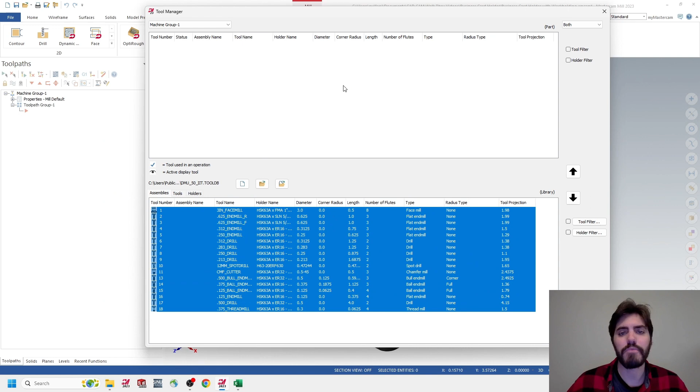Okay, so first and foremost, let's go ahead and get our machine set up as well as our tool library imported. So I'm going to go over here to machine, and then my mill, I'm going to just choose the default machine. And then likewise, again, good practice, come into the tool manager. Inside tool manager, we don't have anything in our library or our magazine. So I'm going to search for my DMU50 library here, and then I'm going to highlight all of these and copy it up here into my magazine using the arrow, so I can pull from it when I'm making toolpath.

All right, so next thing I want to talk about are the planes of this assembly. So if you right click in the free space here and I go to top, this of course is coming from SolidWorks, so the orientation of the planes are going to be a little bit screwed up. However, I think that works to our advantage because it's putting us in a good habit of setting up our planes, which are absolutely needed when we're indexing and rotating the tables for 5-axis. So let's go to planes down in the bottom tab on the left hand side, and we're going to have to reorientate this so we're looking down onto second operation.

So like we've done before, go ahead and click on the plus button in planes, and then click on dynamic. Once we click on dynamic, we should get our gnomon here, and we're probably going to have to fish for it a little bit, but there should be an origin that is coming from SolidWorks somewhere in the middle of our part here. You can see how mine is locking here, and I'm just going to go ahead and click. And we have to rotate around X, or in this instance the A axis, so that Z is pointing up. So I'm going to click on one of these red segments, and I'm going to lock my Z at -90.

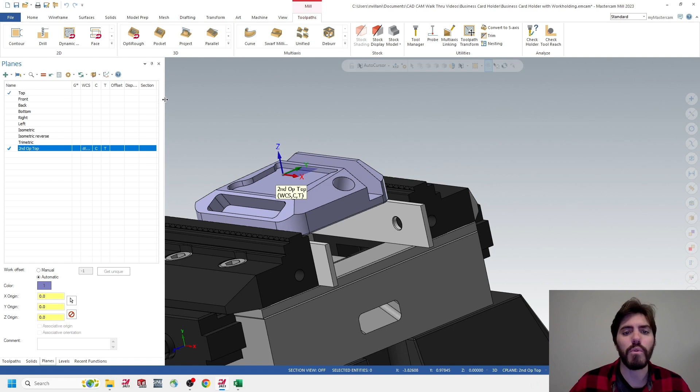I'm pretty happy where that is because that's going to be at my top face for my origin of the part. And I'm going to name this second op top, and then hit the green check mark. Okay, so now that I've set up this plane for this orientation, I want us to keep in mind some of the things we've talked about in previous videos, so that we have to set up our WCS, our C, and our T. When we set up our WCS, our C, and our T, that's just realigning our origin so that when I right click on top, I'm always looking down on the part, as well as my toolpath and my geometry are going to be created from this angle.

However, when we create additional planes for each one of these swivel rotations, you must always double check that your WCS is from the second op top. The WCS in the second op top is almost working like a G54 offset, or whatever offset command that you have. So you don't want to be calling up multiple offsets inside the same program because the machine is going to start to lose track of where it's at. So even though we're going to create multiple planes here for each one of these swivels, just make sure that we have a WCS set here.

Okay, so now that we got the first plane set up, I'm going to start bringing in some additional configurations and setting up planes accordingly to those as well. So let's hop over here to the levels tab, and you'll notice that we have our business card holder as well as all these different components that came in with the assembly vise and the parallels and things like that.

So I can easily toggle them on or off. That's fine. I'm going to keep them on here, but I just want to show you if you're having trouble kind of zooming around, you have total flexibility in turning these pieces off. So what we're going to do is we're going to try to match up some of the configurations that we made to the levels that we're making.

So if you remember, we made a first cycle 800, which is our first swivel rotation, and so on and so forth, all the way up to 5. So I'm going to make 5 different levels here that I'm going to paste or merge those different configurations onto. So go ahead and add a layer here. You might want to add a couple, so we can go 5 here. And I'm just going to name these accordingly.

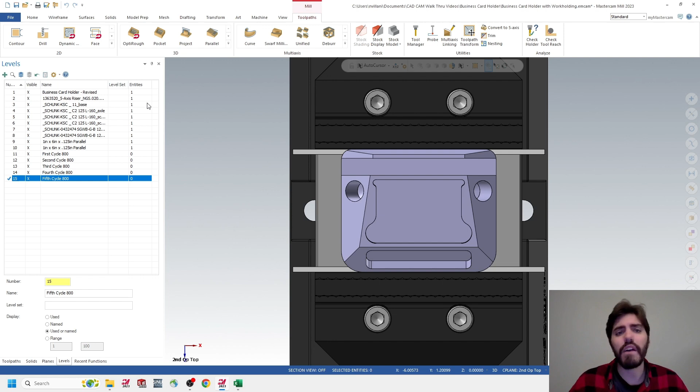Now this is important because whenever we're pulling in a new part or we're merging something into MasterCam, it's going to try to drop that part onto a level. And we don't want these levels to have multiple entities, especially if we want to be able to turn things off quickly, because you're going to be locking everything into one level. Obviously, you can kind of move them around if you right click on it, and then you can change the level here. However, I don't want to have to do that for every single part.

So I'm going to go ahead and click on the first cycle 800 and make sure that my check mark is next to that first cycle 800. And I'm going to merge in some of my SolidWorks configurations. So if we go to File, Merge, we have to change this from all MasterCam files to all files. We're going to look for our business card holder, and then I'm going to go ahead and hit Open.

So when I click on that, you'll notice that it's asking select the desired SolidWorks configuration to be imported. So we're going to go ahead and select that first cycle 800, hit the green check mark, and then we're going to choose the active level. And it might bring up the configurations again, we'll probably have to choose it. So make sure that we have active level selected because that's the level that we're currently on. And we're going to select the first cycle 800 right there, green check mark. And then we can hit the green check mark because we don't have to position this.

I set up this assembly so that whenever you drop a part from the SolidWorks file, it's going to drop right onto the center of the vise. So we'll hit the green check mark. And you'll notice that I now have that configuration that we set up for the first cycle 800. So I don't have to try to mess around and try to align the geometry in such a way where maybe I'm trying to remove geometry or create some wireframe to just access this one portion of the cycle 800 or the swivel rotation.

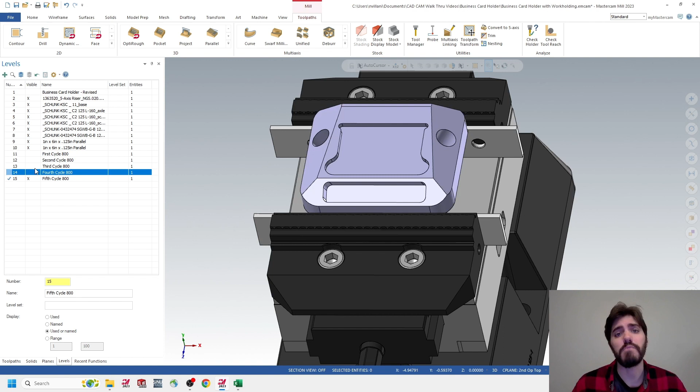Fourth, turn the third off. Fifth, turn the fourth off. And you can see that we're kind of trying to remove some of the geometry, so it just makes it a little bit easier to pick from. I also wanted to show you one way that you could process this into MasterCam. However, you lose a lot of your editability there.

So for example, I'm going to turn all these off and turn on my business card holder, put my check mark next to that. And I'm going to create a new level here, and I'm just going to call this copy remove. So what I'm going to do is I'm actually going to remove some of these features using MasterCam, which might save you some time. However, I prefer to set these up as configurations because I can link them to drawings in SOLIDWORKS. However, I can't do that with MasterCam.

All right, so if I go into this copy remove, I'm going to right click on our business card holder, which is the first level, and then I'm going to copy the entities. And you can see here there are 0 entities in this copy remove. If I click on this copy remove and I right click on it and I paste the entities, it's going to populate with that one entity, which is going to be this exact copy here.

So I can turn off my first level, which is going to be our business card holder from SOLIDWORKS. And then once I turn that off, nothing really changed because we just made a copy of it. However, I want to make sure, and this is very important, that we have our check mark next to the copy remove and that there's the one entity populated there.

So what I can do is I can hop over here to model prep. So inside of model prep, I have the ability to remove certain features in MasterCam. So this kind of works like a suppress, but there's no going back. So if you think about it, you're kind of just locked into this decision here. I can't even undo it.

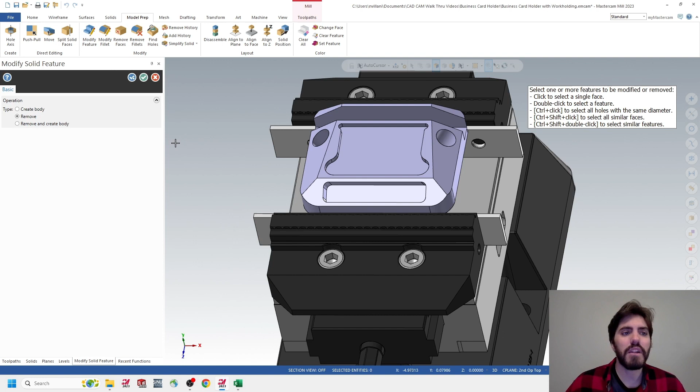So if I go and click on modify feature, it's this little modify feature, it's like a little step with a pencil next to it. Click on modify feature, make sure that it says remove. And then when you click on that remove, you can select, and I'll hold down the shift key and I'll double click, which is going to try to select all of this pocket or all of that feature.

So if I double click on that, it's going to highlight all this detail here and recognize it as one cut extrude. And when I hit the green check mark, it's actually going to remove that feature entirely. So if I click on that green check mark, you see how it removed it? So all that geometry is now gone. I actually can't go back here into solids and try to find that and remove it. So keep that in mind and take that with a grain of salt in how you can process this.

But I'll just show you how to process the rest of this and how to get rid of some of this. So I'll go to modify feature. Once again, hold down the shift key, double click on this pocket here, and then make sure it says remove, hit the green check mark.

Do the same thing with these holes. You don't necessarily have to do this. I'm just showing you it as good practice and how to process this if you weren't dealing inside of SOLIDWORKS and using the configurations. And you can actually take this to pretty extreme levels here.

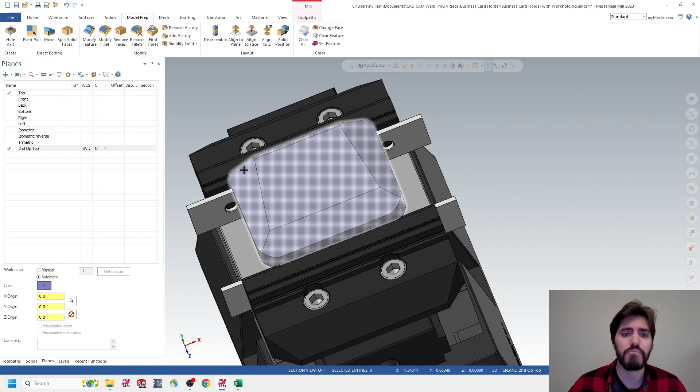This one I don't believe I can double click all the details, so I have to click it one by one. Green check mark. And it's pretty powerful. I mean, getting rid of that geometry and actually merging and bridging these two details is pretty impressive. So once again, just keep that in the back of your mind, especially if you're trying to process

more complex parts. So that said, I'm going to hop back over here to the first layer, which is going to be my business card holder, and I'm actually going to turn off this copy remove. I was just showing you that as an example. Okay, so now we're going to have to set up additional levels, or additional planes.

So if we go over here to the planes tab, we have to set up a new plane, or a new swivel rotation with a cycle 800 for each one of these faces. What I'm trying to do is teach the machine to walk over to this edge, and then at that edge rotate it at a certain angle. So each one of those movements we're going to have to keep in mind.

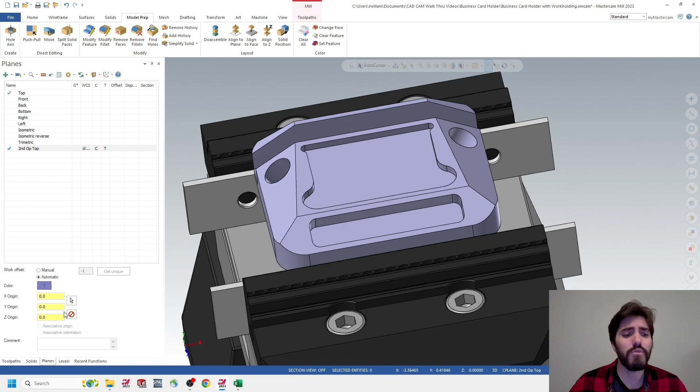So we're going to make a couple new planes here, and this is where hopping back and forth to our levels and accessing some of these different swivel rotations and the configurations is going to help us out. So I'm trying to grab a corner here. I'm not totally convinced that this corner is exactly what I need for this first cycle 800, which is going to rotate the machine like this.

So I'm going to hop back over to levels, and I'll put the check mark next to the first cycle 800 and turn off my business card holder revised. So I'm trying to walk the machine from this origin point over here to this edge, and then at that edge I'm going to rotate the machine.

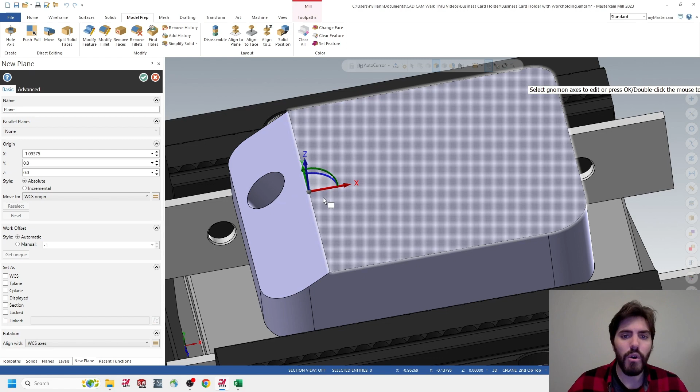So I'm going to hop back to planes, and inside of planes I'm going to once again use my create new plane, dynamic, and this is pretty easy. I just have to line myself up, maybe on the midpoint of this line, and once I click on it, it's highlighted yellow, and it's facing up in Z. Click on that.

All I have to do now is rotate this around so it's in line with this face. I know that this is 30 degrees, so I can click on one of these green segments, which is now going to be the B axis. Inside the compass, we're going to go to 30 degrees. You can see that's lined up pretty good there. And I'm going to name this first cycle 800. And you can see that it moved over an X negative 1.0937.

So that's what I mean by walking the machine over from its original G54, the center of the origin, and from that position, telling the machine to walk over to negative 1.0937 in X, and then rotate the table 30 degrees in the B axis. So we'll hit the green check mark, and if I was going to program on the face, I would then have to change it to the C and the T.

However, I'm going to try to process this so that I have all the planes I need before I start making toolpaths, because I think it'll be easier to pull from this library of planes rather than having to make some geometry, come back, make some geometry, come back. So I'm going to repeat myself a little bit here in terms of jumping back to the levels, the planes, levels, planes.

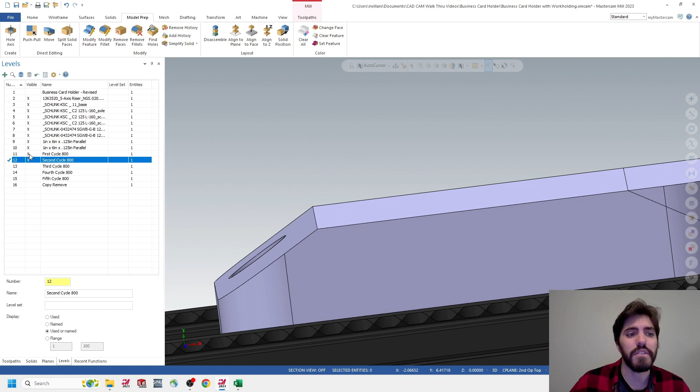So we're going to go back here to levels. We're going to turn on our second cycle 800. We're going to put the check mark next to that second cycle 800 and turn off the first cycle 800. So now I can see this side here.

Okay, so then we're going to go to planes once again, and we'll create a new plane, and we'll create dynamic. And once again, I'll just kind of try to grab the midpoint here, grab that point, and then I'm now going to rotate in the B axis again using these green segments, and then rotate it to 30 degrees. Okay? And then I'm going to name this second cycle 800, and then hit the green check mark.

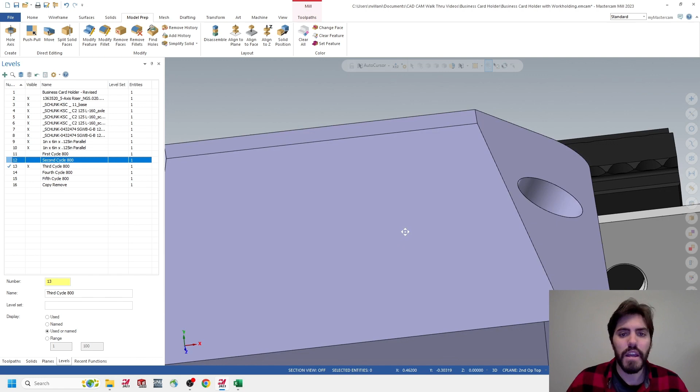Okay? Once again, we'll hop here back to levels. I'm going to turn on my third cycle 800, put the green check mark next to it, turn off my second cycle 800. And this one is actually going to be on that face. So we're trying to remove this whole material here. And this is at 5 degrees.

So I'm going to go to planes. I'm going to get my dynamic once again. And then I'm going to hover over this edge here, if it wants to give me the point here. If I'm not getting this midpoint, they're kind of grabbing it. There it is. You could always grab one of the corner edges as well.

But this one is going to be around the A axis, which is going to be X. So I'm going to take this and I'm going to go to 5. And then we're going to name this the third cycle 800, and then hit the green check mark.

Okay, hop back here to levels. Fourth, turn that on, put the check mark next to it, turn off the third, and that's going to be this front face here. So we'll go back to planes. We'll grab the dynamic.

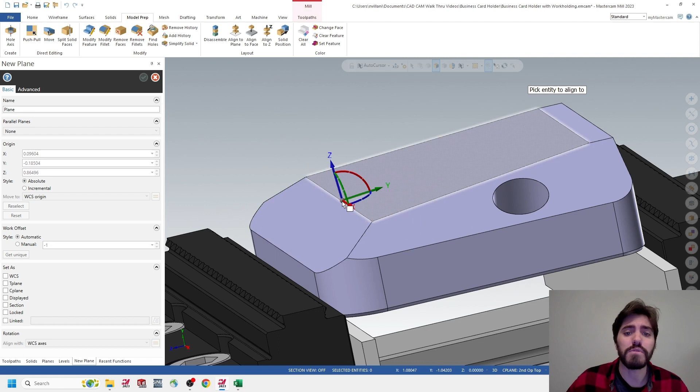This is almost like a compound angle because what we're doing is we're rotating it from the 5 degree point. And then if we were doing this at the machine, you'd probably have to do some trigonometry to find out where this exact edge is. However, here in MasterCam, I can go ahead and just click on it and rotate it that way. So I'll click on that edge there, and then I'll rotate this an additional. So this is compound from 5 degrees.

I don't have to account for it in MasterCam, but this is going to be that 25 degrees up here at the front. So I'll go here to 25. And just make sure that's in line. It's pretty good. And then we'll title this fourth cycle 800. And then lastly, we'll come out to the fifth, which is going to be this front side for the nameplate.

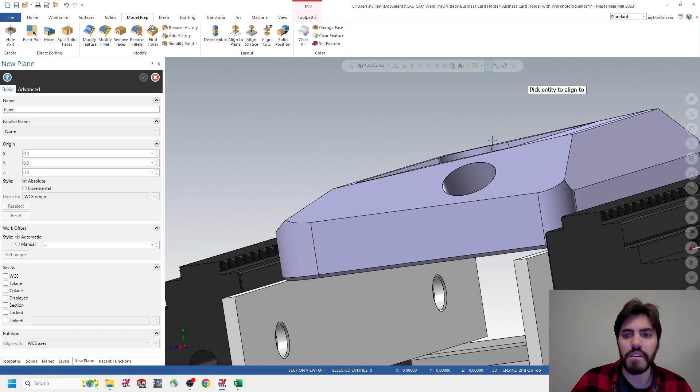And I'll jump back here to levels, turn on my fifth, green check mark, X. And I can go ahead to planes, hit the plus button, dynamic, and we can just grab that face. And this is going to be either 75 degrees or 15 degrees, however way that you're looking at it. So once again, we're kind of rotating around the A axis here. So I'm going to grab one of these, and then I'm going to go to negative 15, like that.

We could, if we wanted to, and I'll probably talk about this more in an optimized programming video, but if I wanted to, I could make a swarf. And that said, I think I even set this up at the swarf. I actually have to adjust this so that the Z is pointing up because I want the machine to rotate like this so that I can actually engrave. So I want Z to be facing up.

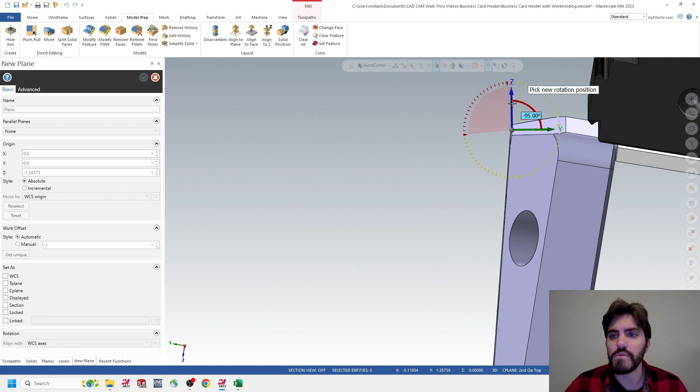So quick fix there. Go ahead and grab one of these red segments, and then we'll have to add that 90 degrees back into it. So we're just rotating it back so that the Z is facing up. And I'll name this 5th cycle 800.

So the first way that I did it was kind of muscle memory, if I wanted to make it a swarf pattern where I'm cutting with the outside edge of the tool. However, I'm cutting with the base of the tool here because I want to use the same plane when I'm engraving. So I'm just trying to make it simple here for the lesson that we're doing. So I'll hit the green check mark.

And now I should have all of my planes here, ranging from the second op top, which is going to be our work offset, all the way down to the 1st, 2nd, 3rd, 4th, and 5th cycle 800s. Okay, and you can see that you could just as easily pick up all those edges here using that copy remove that we made.

Definitely gives us all those edges that we need, except maybe these 1st and the 2nd swivel 800, swivel rotation cycle 800. But again, kind of however way that you want to approach this. So now that we've set up all of our planes, let's go ahead and start applying some toolpath.

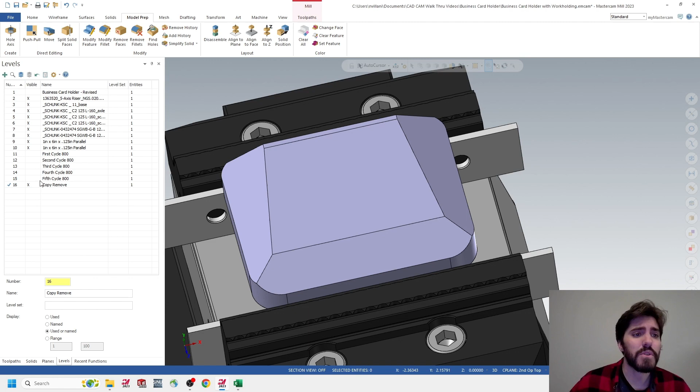So I'm going to go back and just turn on my business card holder. Actually, I want to go to the 1st cycle 800 and turn this business card holder off, put the green check mark next to the 1st cycle 800, and then we'll also grab the copy remove here and turn that off. It's just going to save me a couple clicks here in the next few steps.

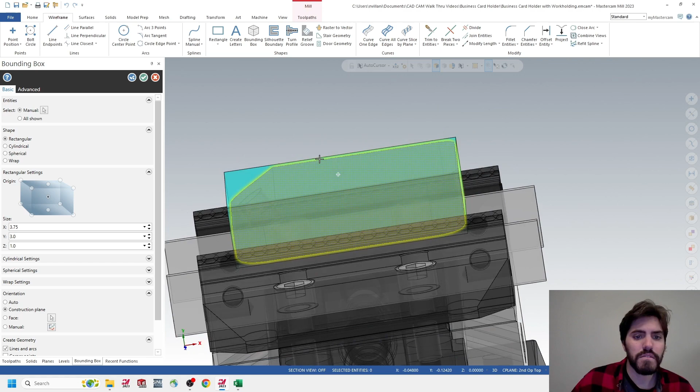So first and foremost, I'm going to create some wireframe geometry as well. So I'm going to create a new layer for the wireframe geometry. I'll go wireframe. And just like that, I'll go ahead and create a stock model for this as well. So inside that wireframe geometry, you can hop over to the wireframe, click on bounding box, and we'll just make this from the center, and then we'll give a value here of 3.75 by 3 by 1 inch, so that we're extruding in both directions here with the green check mark.

And then we'll go over to the properties, and then we'll get our stock setup, double click on that, and we'll do the exact same thing with the bounding box. And we'll grab the manual selection, and then from the center there, we'll make it 3.75 by 3 by 1. Okay, and then we'll hit the green check mark, and we'll hit the green check mark once again.

And if we're having trouble finding where that stock geometry or that stock model is, we can always hop over here to the toolpaths tab, and then we can toggle the stock display so that we see it. So it's matching up to all the lines that we set up already.

Okay, so we're going to do a face mill here, and then we'll hop over and do the 1st cycle 800. So go over here to planes. Just make sure that you're on the 2nd op top. We have our WCS set to the 2nd op top, as well as our C and T, because that's our first detail here. So inside toolpaths, we're going to go to face mill.

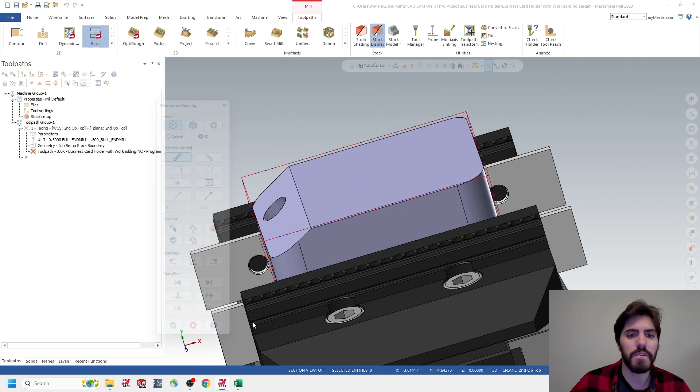And again, we don't really necessarily have to set up the wireframe geometry. I just get in a good habit of doing it, but it allows me to just click the chain that I'm looking for. I could fast forward through it with the red button there, green check mark. Tools, I'm going to find my 3-inch face mill, and we'll just title this 3-inch face mill. Okay. Cut parameters, we're going to change this from 1 way to 1 pass.

Approach distance will be 25%, 25% exit. We're going to leave nothing on the face, and then we'll go to depth cuts. So again, we can always go back and reference our tool library, and we can go to our 3-inch face mill. And I can see that my depth pass max is 60 thousandths there. So I'm just going to type in 0.0625. I believe we're only taking off 30 thousandths, so this really isn't going to come into play. However, just good habit to always keep it there.

Linking parameters, I just try to default these all out to absolute, absolute, absolute, absolute. Top of stock, again, it's about 30 thousandths above the part, so if I wanted to, I could click on the wireframe geometry there, and then depth, we can just grab one of these corners on the top face to make sure that that's 0.

And this is where we're probably going to have to start checking another parameter here, and that's going to be the planes, and just make sure that we're always registering the planes that we want. So whenever we're going into additional and future toolpaths, we want it to read second op top for our working coordinate system, which is our WCS, and then our T and our C, which is our tool plane and our construction plane. We're probably going to change those given the swivel rotation. So this first column should always read second op top, and then we'll hit the green check mark.

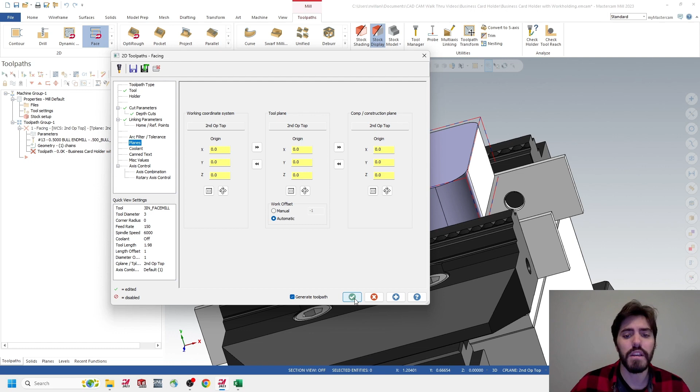So I have the geometry that I want. Why don't we just go ahead and verify it just to double check that everything applied. So I can go over here to verify.

Okay. So, all right. This is a good point to talk about how to turn on our vise and riser assembly as well. So right now I just see my stock model for the part.

If I wanted to see my full assembly here, I can click on the workpiece inside of the Home tab of Verify, and you'll see that my workpiece is hidden there underneath it. And I can actually toggle it so you can see through it, so it's transparent, and then I can turn it off completely. Likewise, I can turn off my wireframe if I'm tired of seeing that, and I can see what this would look like with everything on with the assembly.

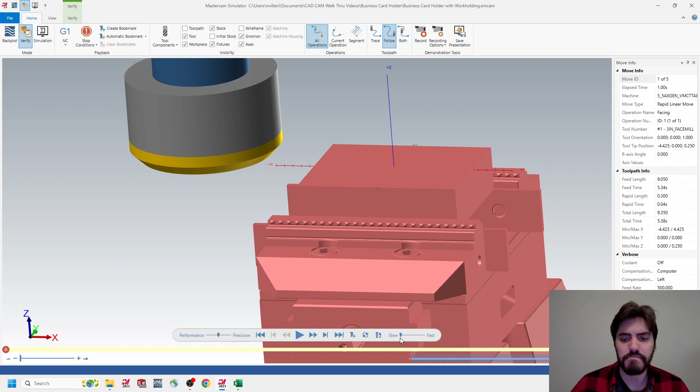So I'm going to slow this down. Be a little faster. Take one pass off the top. And one thing I want us to keep in mind here too is we really haven't looked at this too much lately, but I want you to look at the feed time. So that one operation was only going to be about 5 seconds.

So as we start to optimize our program, these numbers are going to start to increase, and we're trying to keep that down because I think once we apply all the geometry, it's going to be around 26, 27 minutes, and I'd like to see this part cut in under 15 minutes. So I'll make another video about optimizing the toolpath. However, we're just going to try to get all the toolpath in place with this video.

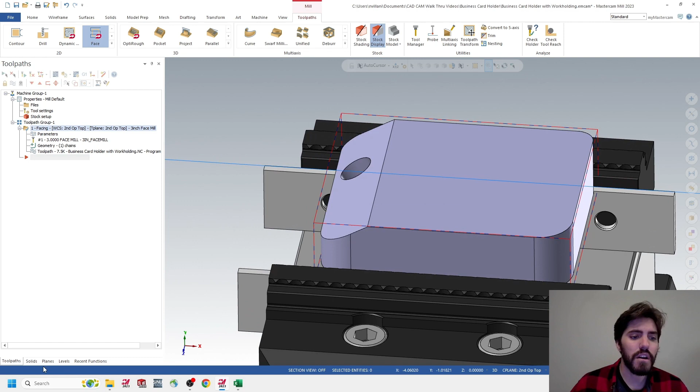Okay, so we've taken our first pass off the top. Now let's go ahead and try to cut this first cycle 800. So if I go over here to the planes tab, again, you want to keep this second op top, which is our work offset, as the WCS, or the working coordinate system. With this first cycle 800, this first swivel rotation, we're going to change the C and T plane.

So you can see that the Z plane is now facing up as if the table is rotated in the B axis there. So we're going to hop over here to the toolpaths, and now we're going to do the face mill once again, but we're going to utilize the geometry of this entire face.

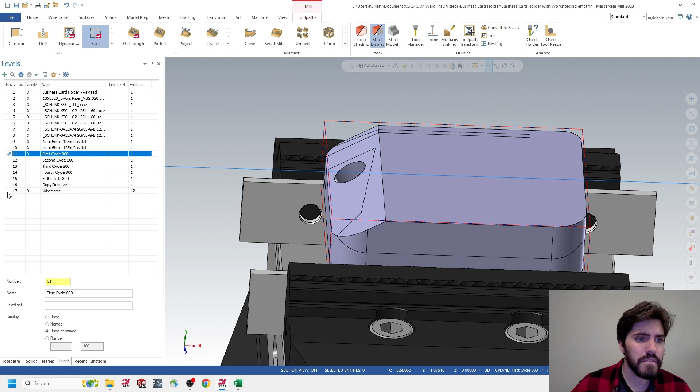So if we had the part open where it was like this, I'm going to turn off my first level. I might be missing some geometry here, especially if I'm trying to rough this out. So that's why it's helpful to create some of these configurations, because I don't want my toolpath to be stopping short. Okay, so I'm going to go back to the first cycle 800, put the check mark next to it, and then turn off my first level, which is the completed business card holder.

Okay, toolpaths, and then we're going to grab the face mill in the 2D gallery here. And I'll have to change from wireframe. I'm actually going to go here to solids. And inside solids, I could grab this whole face. However, I'm going to advise you against that because it's going to include this hole here. So again, if you try to remove that detail with the configuration, it might be helpful.

However, I'm going to try to process this where we do all of our swivels and then do all the milling on that swivel. And then I'll show in another video if we wanted to optimize it with swivels versus tool changes. So I did want to include this with this specific configuration in the way that I'm processing it now. However, we don't want to click on this face because it's going to try to mill around that circle.

So what I'm going to need to do is change this from face to loop, and we're just going to grab this loop here. So don't grab the face, grab the loop, which is the outer extent of the detail. Hit the green check mark, and we'll go over here to toolpaths. We probably won't be able to utilize the 3-inch face mill, and I can show you because it's a little bit too big, and I'll just do a really quick toolpath here.

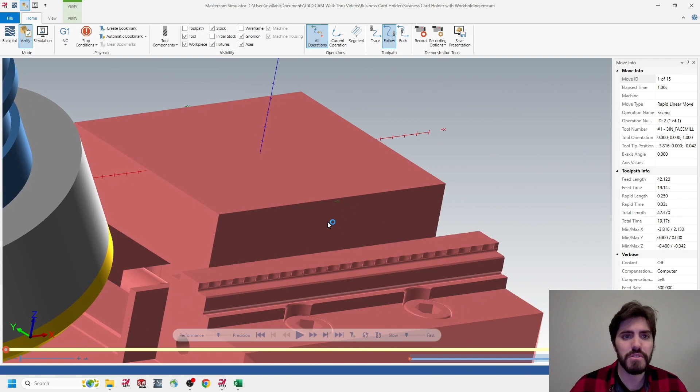And we're going to go to planes and make sure that it's reading second op top, first cycle 800, first cycle 800. So even though I hit the green check mark, you're going to see that it's probably a little bit too much for this specific operation, especially if I'm going into my verify. I think the tool is just a little bit too big when you're considering that there are other details underneath it. And we're most likely going to be hitting into our vise. Even if we're coming the opposite way, coming this way, we're probably going to hit the vise too. And I'll explain how some of that works here.

So I'm going to go back into that facing, and if you were at this point, if you didn't follow me, that's good. So we're going to hop back here to the 5/8 end mill finish, and we're going to name this 0.625 end mill, and we're going to put a note here for first cycle 800, and we could put like face after it as well.

So I just wanted to show you why we're choosing this 5/8 end mill over the 3-inch face mill, because previously in every video we've always used the 3-inch face mill whenever we're facing. However, you can utilize other tools using that face mill option. So we'll hop here to cut parameters. It should still pick up some of our details from the last toolpath that we generated. So it's going to go to one pass.

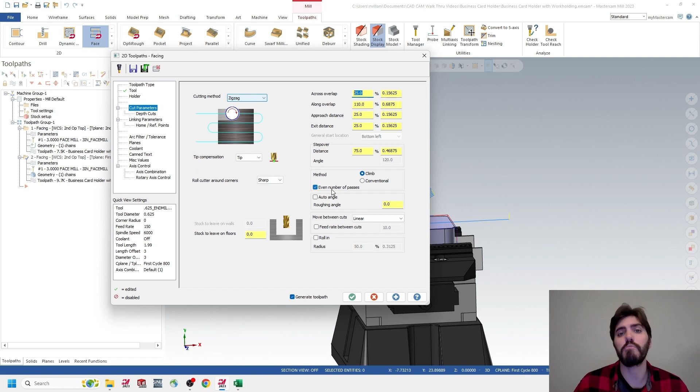However, we're going to change this to zigzag because we have a smaller tool. We can't actually do this face all in one pass. And we're going to come back here and adjust the overlap as well as the angle that we're approaching. But I wanted to generate the toolpath first and then show you what that looks like.

So depth cuts, we actually will have to update this a little bit. I would probably say that with the 5/8, we could go to 0.3125 depth to cut. However, I want my tool to be a little bit sharper. We could optimize it and use like the rougher tool and go the full depth, but I just don't want to make a bunch of tool changes here, especially when we're doing cycle 800s and swivel rotations. So I'm just going to utilize this tool but go half that depth.

So I'm going to change this from 0.0625. I'm just going to make it 0.15625. And then make sure that the keep tool down is selected. Linking parameters. This is going to be a little bit different. So right now the top of stock is kind of reading where the stock material is from what we set up in relation to where that plane was set up off that face.

So if you think about it, there is still material here from this face to that corner, and that's where that measurement is coming from. So it's measuring this flat face because we set up our zero plane for the swivel at this edge, and we've now rotated it so we still have material from basically this corner up here to that corner. So that's what it's registering. We could change that if we want to. However, we want to account for that material, especially when we're trying to rough it away.

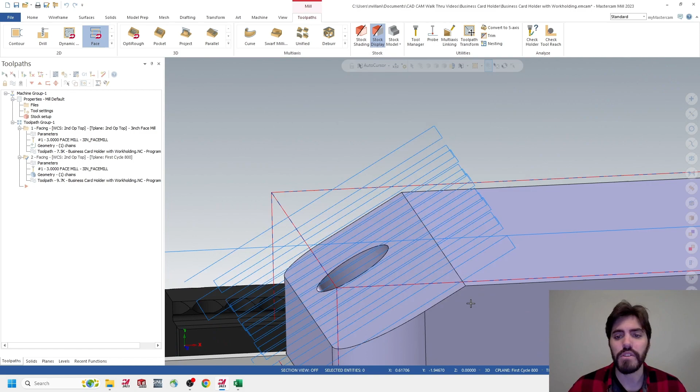So go down here to planes, and inside that planes, make sure that you're reading second op top for the working coordinate system, and then first cycle 800 and first cycle 800. And then we'll hit the green check mark. Okay, so that's looking a little bit better. We're not going as far down. However, I'm worried about especially like this edge here.

And when I project the tool, I'm actually going to backplot this as opposed to verify. And I'm just going to fast forward here to the end. And you can see really quickly that we're going to hit the vise. We're going to hit our hard jaws. So not exactly the toolpath that I'm looking for. However, I can make some slight changes to improve this and try to optimize it a little bit better. So I'm going to hit the green check mark on my backplot, and I'm going to hop back here into my parameters.

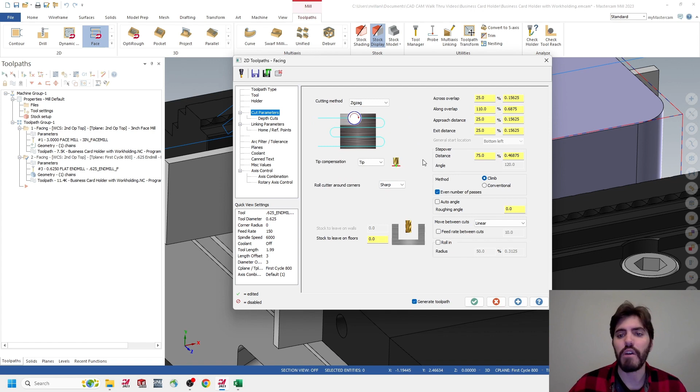So inside parameters, we're going to go here to my cut parameters, and now I can actually manipulate my geometry a little bit more. So we've never really explored this. However, I am going to change the angle of approach because right now I'm cutting this way, so I'm zigzagging this way, but I want the zigzags to go this way, so up and down the part. So if I change this, I could either try to auto angle it. However, I like a little bit more control here, and I can go ahead and just type in 90 degrees. So I'm actually rotating my toolpath.

And then my across overlap, I'm going to change this anywhere from like 10 to 15 percent. So I'll make it 10%, try to tighten it up, and then hit the green check mark. And you can see with two changes there, it got rid of quite a bit of toolpath. And not only that, it optimized it in such a way that I'm actually going up and down the part.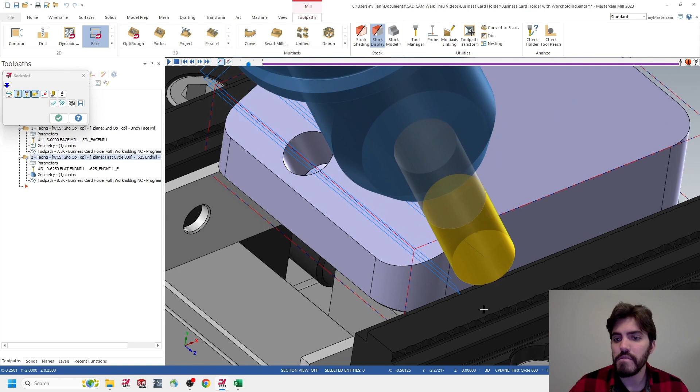And when I backplot this, I'll just pull this all the way down here to the end. My tool is, oops, go back a little bit. My tool is well and away from the top edge of the vise. So very important that we investigate that because we don't want to accidentally crash into our vise and have to repair our spindle or break a tool or something like that.

Okay, so pat yourself on the back. That was the first swivel cycle 800 that we did with 5-axis. So that's called indexing. We're just locking the table in and we're taking like a face mill. So if we were trying to do this with traditional methods with like 3-axis programming, we'd have to either create a custom vise or work holding assembly so that we rotate the part in 30 degrees and then cut it like we just did, or we'd have to try to ball mill this out, which would take quite a bit of time. And I'll pull up another file, especially when we're talking about the optimized toolpaths, and I'll show you the difference in terms of time and everything like that.

Okay, so we've done one of these, and now we're going to hop over and we're going to do the second cycle 800. Oh, my apologies. We actually have a hole to drill here. So before we hop over here to that second cycle 800, let's go ahead and plunge that hole. Pretty simple. We're still in the same working coordinate system in the C and the T planes. So we'll go over here to the 2D gallery, drop this down, and we'll grab the drill.

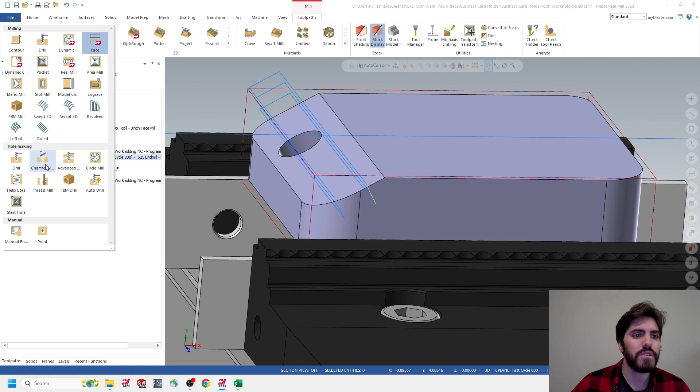So we'll get that drill, and we're just going to grab this hole, and then it's a 1/2 inch diameter, so I know that I have to pull a 1/2 inch tool. So I'll hit the green check mark. Tool. We'll go and zoom down here, scroll down to the 17th tool, which is going to be our 1/2 inch drill. And I'll just give a 0.500 drill, and then I'll title it first cycle 800. Okay. Cut parameters. We can just leave it as a standard drill here. You don't have to peck it or anything.

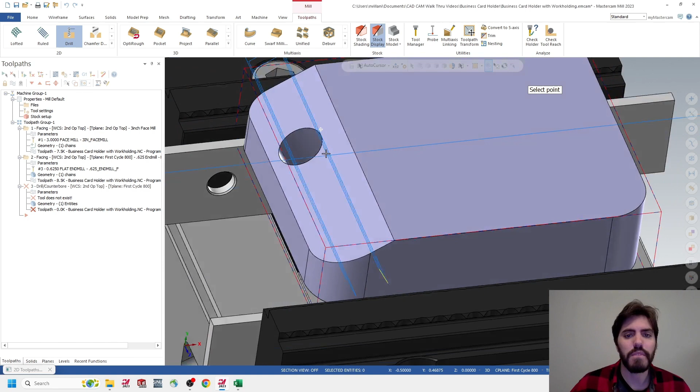Hop here to the linking parameters, and we'll just do absolute, absolute, and absolute. This is one detail that we are going to change here because the depth is reading at that top base. We'll hit the depth, and then we'll actually grab that shoulder there. So we're going that distance down. Okay, tip comp will be important to include. Even though we're not breaking through, I want to tell the machine or the program or the G-code that we do have a 130-degree tip angle here. So I'm going to turn that on. My breakthrough amount, I'm going to put 0, but my tip angle is going to be 130 degrees.

And then again, good habits to get into, but look at the planes. We got second op top, first cycle 800, first cycle 800. Green check mark. So we got our drill there. We could do like a transform and mirror this over, but I'm just going to do our reps here and try to do everything by hand so we have some control over it. Okay, so let's go ahead and hop over here to our planes. We're going to now go to our second cycle 800, C and T, so you can see where it rotated.

I'm also going to go over here to my levels because I want to be able to pull that hole. And I'm going to turn on my second cycle 800, put the check mark next to it, and turn off my first cycle 800. Okay, and again, I'm just trying to get our reps in, so let's go ahead and do this once again. So we'll go hit the drop-down menu, we'll get face, and then, instead of getting the entire face of this, make sure that we're choosing the loop.

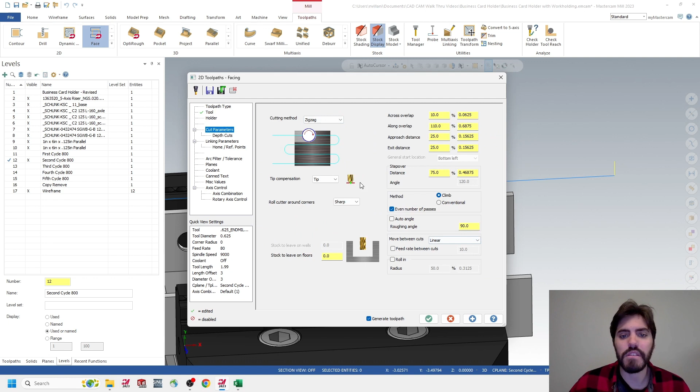So we'll get this loop right here, green check mark, tool, we'll get the 5/8 end mill, and we'll title it 0.625 end mill. I think we named the last one first cycle 800, but this time we're going to name it second cycle 800, and then we put face after it. Okay, and then we'll do cut parameters, zigzag, it's remembering everything that we had before. Depth cuts, still the same. Linking parameters, pretty much the same. Again, good habit, but make sure we're here in planes.

If you missed that portion where we went to the planes and we changed it to the second cycle 800, you do have the option here to look up from your tool planes. So there's the second op top, which should be that working coordinate system. However, if you're seeing first cycle 800 in both of these columns here, you can always click on this select tool plane, which is this little box, and then here you can choose what planes that you want to be pulling from.

So we want to make sure that we have the second cycle 800 selected. And I'll just show you a bad example, but if I had the third cycle, I could put that there. And if I wanted to copy this to that next plane there, I could hit this little fast forward button, and then it would go to that. However, I want this to read in the second cycle 800, and I'm just going to copy that back over there. Okay, and whatever plane that you have is going to be relative to where the linking parameter is pulling the top of the stock from.

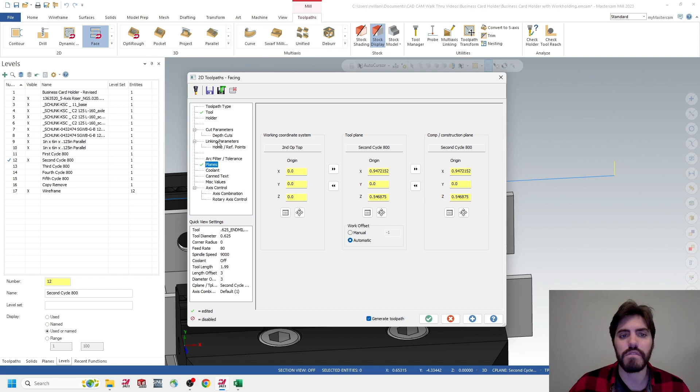So once again, imagine that we're at the zero face here, and then we've created stock in that direction there. So this whole little sliver here. And I'll hit the green check mark. Okay. So you can see that we have a very similar toolpath mirrored over on the other side, but we created it. It's not like a transform mirror.

And then we're going to go and hit the drill command, and we'll do the same thing there. So drill command, and we'll grab this hole, 1/2 inch diameter, green check mark, tool. We'll just grab the 1/2 inch drill, and we'll title this 0.5 drill, and we'll do second cycle 800. Okay. All this should be relatively the same. I'll just double check my parameters here. Absolutes, tip comp, 130, planes, second and second. Okay, so green check mark, placed my drilled hole.

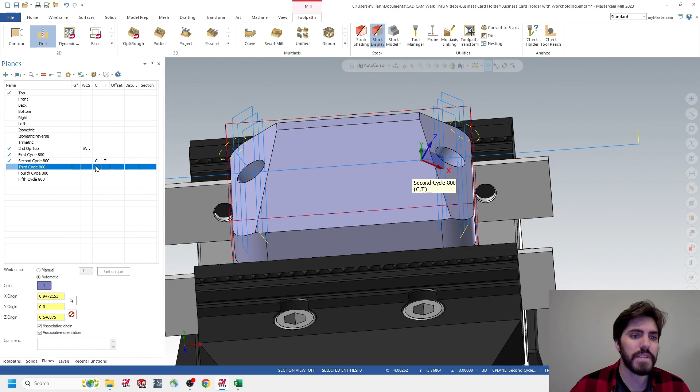Okay, so that's now our second rotation, or our second cycle 800. So we're really cooking with gas here when we're talking about indexing and 5-axis programming. So we'll go over here to levels. Once again, we'll turn on our third cycle 800 because now we're going to move into this face. We'll put the check mark next to the third cycle 800 and turn off the second cycle 800. Planes, we're going to change only the C and T for the third cycle 800. And we're going to do a face mill with this detail here. So go to face.

And if you wanted to, you could hop over here to the toolpath so that you see that it's generating. We'll just grab the loop again rather than this whole face. We could grab the whole face, that's fine, but I'm just going to grab the loop here. And you can see how this might not be advantageous if we had that chunk taken out in the front there. So if we were just grabbing the finished model, especially with that fourth cycle 800 included, it would probably end right here.

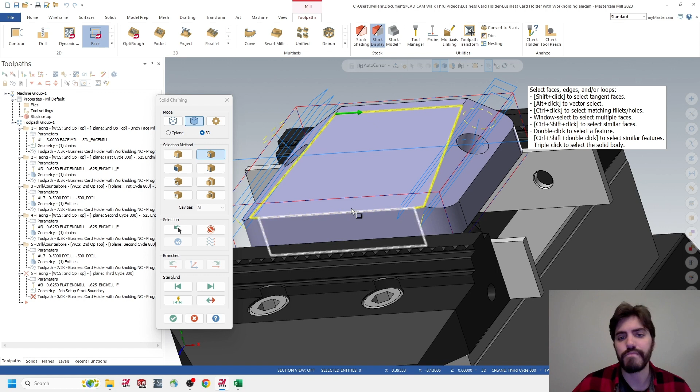However, we don't want to leave that material, because when we eventually come to that fourth cycle 800, we want this material to be removed, because we don't want to accidentally plunge our tool when we're rapiding too close to it. So I'll just grab this whole face. I'll hit the green check mark, go to toolpaths.

This time we should be able to utilize the 3-inch face mill, and we can do like a single pass across. It might make it a little bit quicker. So why don't we go ahead and get that 3-inch face mill there. We'll do this once again. And there's some thought process behind optimizing your toolpath and using the tool that you currently have out, as opposed to doing a tool change. And we'll talk about that in another video. However, I'm just going to do this in the simplest terms.

So we'll do a 3-inch face mill, and then we'll put after it, this is going to be our third cycle 800. So kind of imagine this video as that we're not really caring about the final run time. We're just trying to get all the toolpath in right away. So zigzag, we can change this back over here to 1 pass.

I'll actually show a bad example, but if we forget to change this 90 degrees, it's actually going to plunge the wrong way. So I'm going to leave that. We do want it to be 0, but I want to show what it looks like. Okay, depth of cut. We're going to change this back to 60 thousandths. Keep the tool down because we are going to actually be making quite a few passes here.

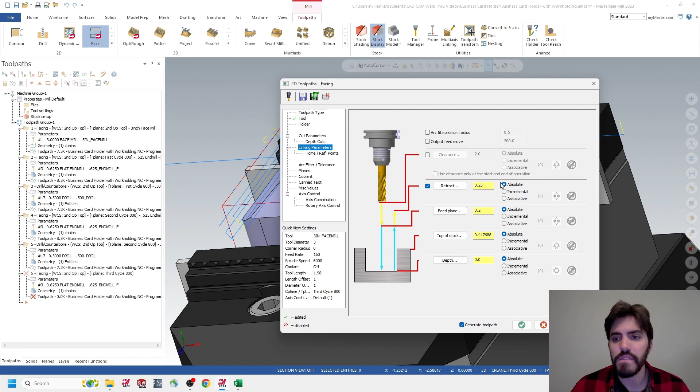Linking parameters, you can see that we do have some material that's hanging out above here. So absolute, absolute, absolute. We can go here to planes, and we're reading second op top, and then third cycle 800 and third cycle 800. So if I hit the green check mark, tool diameter is not big enough for the one face. So I think that was because of the 90 degrees. I was actually hoping that it would plunge, but let's go ahead and change this back over here to depth cut. And we'll change this over here to 0.

So when we did the 0, it's actually giving us the side-to-side motion that we wanted. I wanted to, and maybe I'm a little bit destructive, a little bit of a masochist here, but I wanted to see the tool actually plunge into the face of our vise here. However, I was not able to replicate that this time.

Okay, so this is where we're going to have to hop back and forth between our different levels, and especially our configurations. And I'll show you exactly what I was talking about with why we wanted to include this entire face and isolate this swivel from the 4th cycle 800, because I have a pocket that I have to mill out now too. So if I go over here to levels and I turn on my finished business card holder, you'll notice that I do have a pocket that's underneath, which is going to hold the sticky notes.

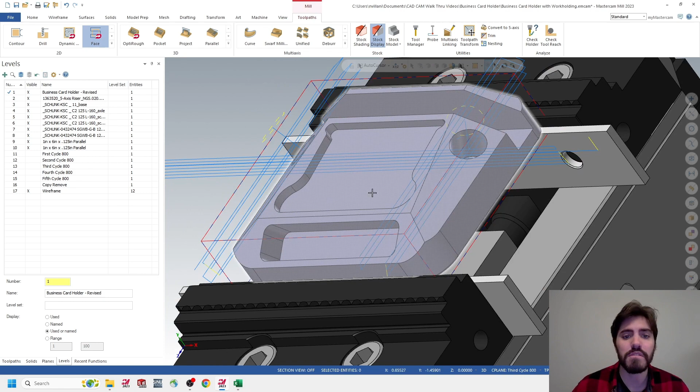So I'm going to put the check mark next to my business card holder and turn off my 3rd cycle 800. And you can see that the toolpath, if I just did this loop from that edge here, I would be missing some of the material from the slot where it's going to hold the business cards, as well as this detail in the front where it would truncate it a little bit shorter because it's angled to hold that date plate or that calendar.

Okay, so you can see why isolating out some of these faces or configurations into their own separate levels and planes are really going to start to help us as we approach cycle 800 and swivel rotations for 5-axis programming. So that said, I'm actually going to start to look at some of these more fine details, like the pockets and the slots, as we go through some of these swivel rotations. So this pocket here, since we're on the 3rd cycle 800, we've already milled this face away. I'm going to start to look at this detail here.

And this is going to be a little bit tricky for us because I know that these corner radii are pretty tight. And if I wanted to, I could investigate it and see what size they are by clicking on the Home tab, going to Analyze Entity, and I could actually click on one of these corners or radii. And I can see clearly here that the value of that is 0.075. And that's going to really narrow down or eliminate a lot of the tools that are currently in my library. And it leaves only one real option, which is going to be a 1/8 inch end mill, because that corner radius is going to be 0.0625, which is smaller than this 0.075.

So that said, consider we have a 0.250 or 1/4 inch end mill, or a 0.312 or 5/16 inch end mill, and that's just going to be too big to swing in some of these corners. However, I can still use them to rough out some of these details, and I'll show you some time comparisons. I know I said I wasn't going to go too deep into those time comparisons, but some details like this are just too hard to ignore, and I'll show you the comparison there.

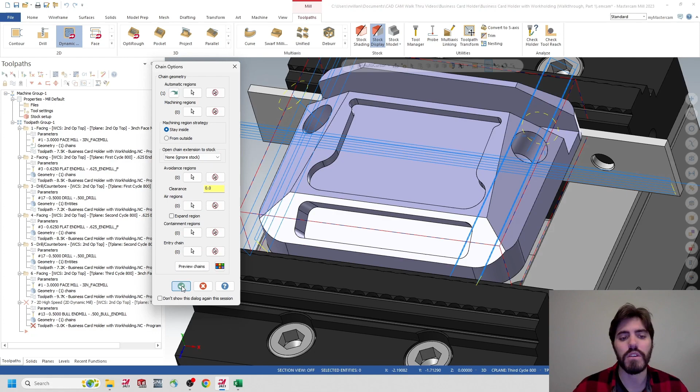Okay, so I'm going to choose a tool here, and I'll show you again a bad example of this, but I'm going to find that 1/8 inch end mill, which is a pretty small tool, and I'll title this 0.125 end mill, and put a note afterwards as a 3rd cycle 800 pocket. I'll come down to cut parameters. I'm not going to leave anything on the walls or the floor, so I'll zero that out, 0 and 0. Corner parameters, don't have to worry about that.

Depth cut, we do have to consider this because our 1/8 inch end mill has a max depth cut of 0.0625. So I will update this. I'm going to turn on my depth cut and go 0.0625. Come here to linking parameters, and I'm just going to do absolute, absolute, absolute, and absolute.

So one thing to consider here, the top of the stock is actually registering from this face here to the stock material. However, we actually cut away all the material above it with that last third cycle 800 face mill. So I'm going to change top of stock to the default value, this top corner there, and it's going to zero it out. And then my depth, I'm going to go a little bit below, oops, change that to absolute depth, and get a value of negative 0.125.

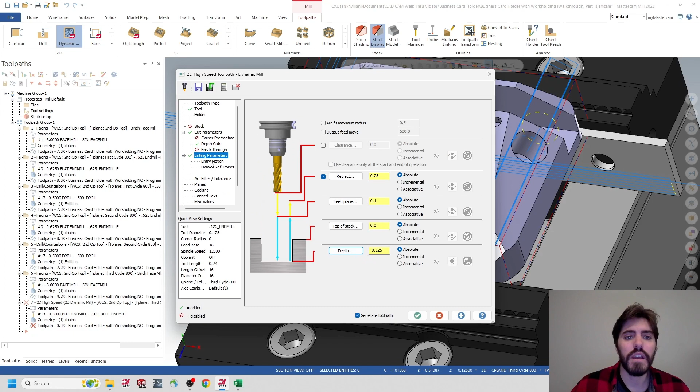And now we're going to talk a little bit about the entry motion. We really haven't explored this too much with pockets, but I want to mention this. It's always going to default to helix, which in my opinion is the best approach because it's cutting into the material, orbiting around the center of the tool, and going down in X, Y, and Z. I think that's better than just plunging down and potentially damaging the tool or the part, as well as ramping down, which puts a lot of cutting pressure and gives you some chirping when you're approaching in.

So I think the best practice here is the helix, and I'll show you what it looks like in the verify, but in dynamic it's actually going to give you the calculated value by the size of the tool. So if I change the tool, it'll update. You really don't have to consider that. And again, good practice to come down to planes and make sure this is registering how you want it to. We see it as second op top, third cycle 800, third cycle 800, and we can hit the green check mark. This is going to take a bit to process because of how much toolpath is being generated. And you can see, there's quite a bit there.

And if I wanted to, I can investigate what the total runtime of that would be. I'm going to just click on this one detail, and then I'm going to verify that out. So I'm going to see what this ends up being. And you can see that time is actually starting to add up pretty quickly. I have a value here in the feed time of 16 minutes and 11 seconds. And I'll just quickly show you what that helix looks like.

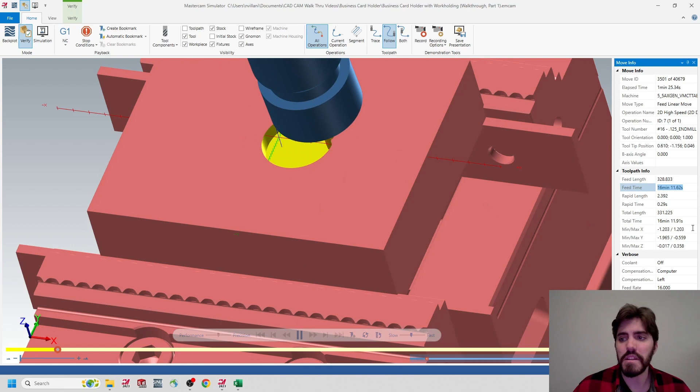You see how it's rotating around, but 16 minutes is about what I want the entire program to run. So I think that this is a little absurd, and we should not dedicate that much cut time to this one detail, especially when you consider that if I X out of this and I grab all these toolpaths, so what was it, 16 minutes and 15 seconds or something like that, all of these details in combination with each other are 17 minutes and 15 seconds in total. So 16 minutes of that, or like 95%, is just dedicated to that one toolpath.

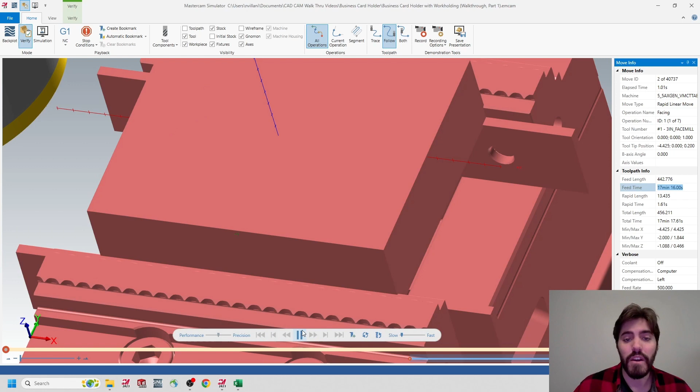And you can kind of see it down here in the play bar where one solid color is one detail. If I could zoom in infinitely, you would see how fast it'll cut through all these face mills. And arguably that's way more material that was removed in 1 minute as compared to how much material is being removed in 16 minutes. So I think that we just have to approach this a little bit differently and try to utilize maybe two tools in this instance, and try to cut down that tool time a little bit.

So I'm going to hop back here into my parameters for that seventh operation, which is that 1/8 inch end mill, and I'm going to choose a bigger tool. I'm going to scroll up here, and I think I'm going to utilize the 5/8 end mill since we've been using that quite a bit. And when we click on these tools, one thing with Mastercam 2023 is you have to reinitialize the speeds and feeds because it's still picking up the values from the previous tool. So if I right click on that tool, I can go ahead and reinitialize the feeds and speeds.

It'll update it. And then I've got to update my comment here to 0.625 end mill third cycle pocket. And if I want to, I can put another note out here. I could do roughing. And I'm going to come down here to the cut parameters. This is more of a perfect world scenario. I would approach this a little bit differently if I was doing this in industry. However, I just want to show you the power of the dynamic mill, and it's going to make it easier for us as we approach some other details.

So I'm going to leave the stock to leave on walls as 5 thousandths, but the stock to leave on floors I'm going to leave as 0, because it's not going to work if we try to blend two tools if there's actually material left on the floor, because it's going to cut the entire pocket anyways if it has to remove that extra 5 thousandths. So we're going to update this: stock to leave on walls 5 thousandths, stock to leave on floors 0. Depth cuts, I can actually turn this off now because that tool is quite big. It really doesn't have to be limited by that 60 thousandths there.

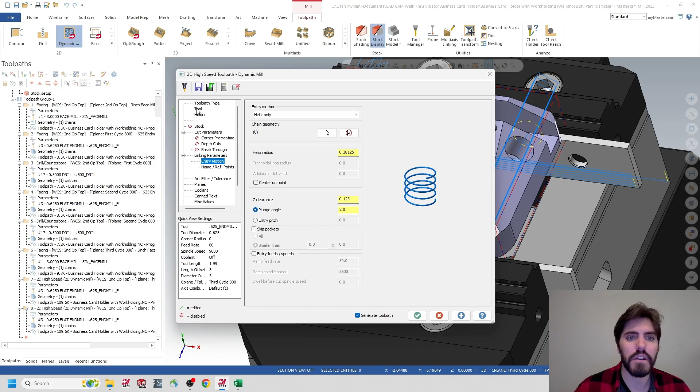We'll come in here to parameters, and again, good practice, we'll come up here to the tool tab. We'll click on 1/8 inch end mill. We'll update the note here. We'll make it 0.125 end mill, and then instead of roughing, we're going to title this as finishing. And again, here in 2023, we have to update the speeds and feeds of that tool. So we're going to right click on the 1/8 inch end mill, and then reinitialize the feeds and speeds. So that will update these values.

And then we'll come here to stock, and inside of stock, we are going to utilize this now because there was material that was removed in a previous operation. So I don't have to spend all the time and remove all this material here because I already removed it with that bigger tool, the 5/8 inch end mill. So I can choose to select rest material, and I can either select from all groups, toolpath groups, or machine group, or one other operation.

I think we did a little bit on this with the bottle opener case study. However, we can just leave this as default all groups. If we had multiple operations here, we would probably just have to do toolpath group only. Or if we had a specific detail that we had to avoid, we can click on the one operation and choose it from this list. But I'm just going to leave this as all groups because we're just sticking in one toolpath group here.

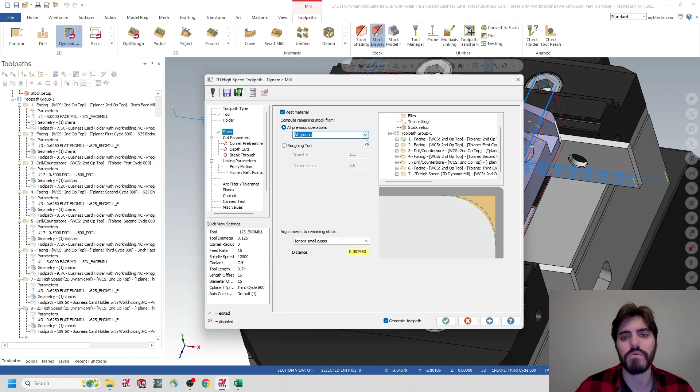Okay, so then we'll come down here to cut parameters. Stock to leave on walls, I'm going to update this to 5 thousandths. And again, this is a perfect world scenario where the blending is going to be no issue. And then I'm going to come down here to depth cuts. Even though this said 60 thousandths before, I am not going to consider that because I already removed most of the material and I'm just doing some slight cleanup passes. I think I can go the full depth of that tool without going into these depth cut steps. So I'm going to leave that off. It's going to go to the full depth, the 1/8.

And then we're going to come here to linking parameters. Everything looks good. Entry motion, that updated. And then we're going to go ahead and hit the green check mark to update. So you'll notice the difference from when I showed you earlier, where there was all this toolpath here in the center, now I'm only cutting out some of these corner details. And it's just a few toolpaths.

So if I look at these two toolpaths in combination with each other, I'll click on the 7th, hold the shift key, and click on the 8th, and I'll go to verify. So from 16 minutes and 15 seconds, we went down to 1 minute and 39 seconds. And like I said, I'm going to choose those two operations over that one operation every day if it's the difference of 15 minutes, especially when the total run time of this part should be around 15 or 16 minutes. So I'll show you what this looks like now.

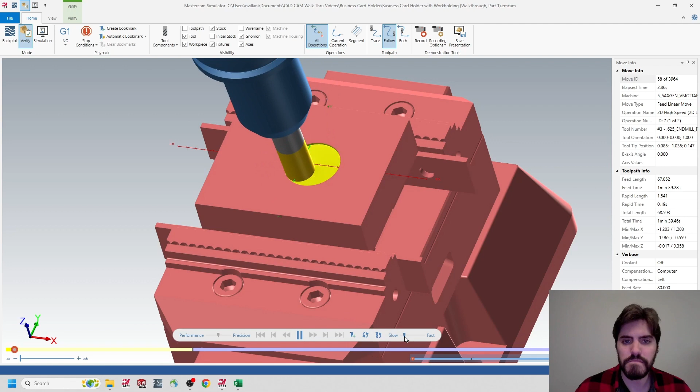We can go ahead and play this out. And we can even optimize this a little bit more, where the 1/8 inch end mill probably doesn't have to helix down into some of these edges since it's already cut away, but I'm just going to leave it at the default values. You can see that it's just cleaning up those couple little edges.

One thing I will mention here, and you can kind of see, and I'll turn off the workpiece here, is that the difference between the blue and the yellow, I'm going to say 9 times out of 10, you're going to see that. So in industry, I would probably spend the time and try to figure out my feeds and speeds a little bit more and just use this 1/8 inch end mill and leave 5 thousandths on the floor from the previous operation and just try to move through this as quick as possible so that the entire surface of this pocket is cut with one tool. That's how I would approach it.

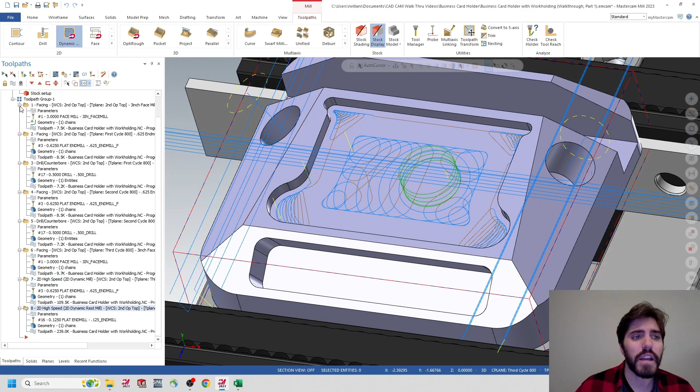However, again, in this educational space, I'm just going to show you the power of the dynamic mill because again, we'll use this same approach with a couple other details. So I'm going to X out of that and I'm going to consider that pocket done. So now I'm starting to get a couple operations here. I can go ahead and start to minimize or collapse some of these if I wanted to. I can use this minus button next to each one of these folders, kind of get some more space here to see what I'm working on below.

So I'm going to start to move into that fourth cycle 800, which is going to be this face. And I think I'm going to go to the levels here. I'm going to see the difference between the fourth cycle 800 and the finished model. So I have a fourth cycle 800. I'm going to turn that on. And I'm not really seeing any difference in geometry here, so I probably don't have to utilize this.

I can go ahead and use the default finished operation or the finished part here to get the toolpath for my operation. So I'm just going to go ahead and bypass this fourth cycle 800 configuration. It's good to still keep it in the background there, and it shows you what's going to be cut in that operation. However, I really don't have to toggle between them now. However, I do have to go to the planes, and I have to go to the fourth cycle 800, and I've got to change my C and my T plane so it updates to that face. So very important, again, make sure that you update that C and that T plane.

And we'll come back here to toolpaths, some more room to work, and I'm going to face mill out this detail, just like how we face milled out the other faces. So go to the 2D gallery, face. I'm going to use the loop because, again, if I went to face, you see how it's grabbing that pocket there too. I am not going to do that, so I'm going to get the loop, and I'll just grab this entire area here. And I'll hit the green check mark.

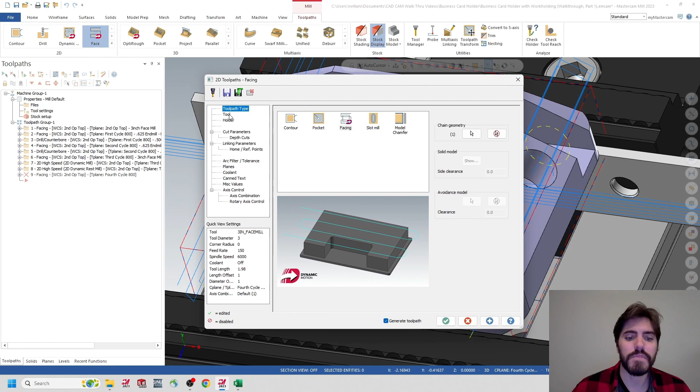Okay, so inside of tools, I'm now going to use the 5/8 inch end mill to face this out. So I'll just do 0.625 end mill, and we'll title this fourth cycle 800. And then we can put face afterwards. And again, you can probably imagine that we wouldn't try to utilize that 3-inch face mill because it would quickly make this into a mess with the vise. It's just too big of a tool to cut that detail. So I'm just going to use that smaller 5/8 inch end mill, just like what we were doing on those side faces. So we'll go to cut parameters.

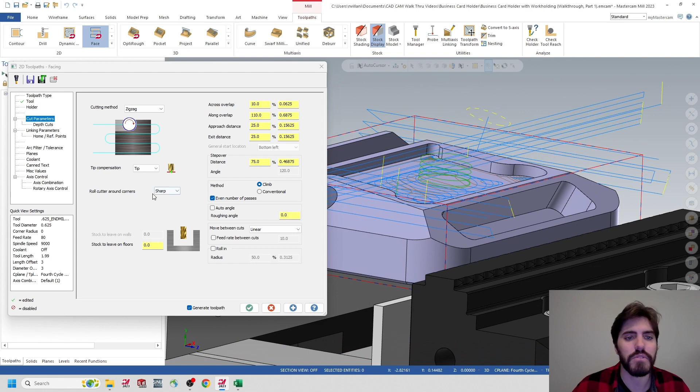We'll probably have to update this from one pass to zigzag. And we might have to change some of these details here, but I'm going to leave them kind of what we had with these other values and see if it gives me what I want. Depth of cuts, we can update this to 0.15625. Linking parameters. Top of stock is going to be from this edge to the top of the stock material that we created. I can probably update this to 0.

However, I want to show this and maybe we'll step it down by hand, what the toolpath is going to look like. And this is a good investigation in how we can use Verify to kind of improve some of these toolpaths. So we'll come down here to planes. We've got second op top, fourth cycle, and we can go ahead and hit the green check mark. Okay, so I see that toolpath. I'm starting to see a little bit too much toolpath here on my screen, so I'm actually going to turn off some of these.

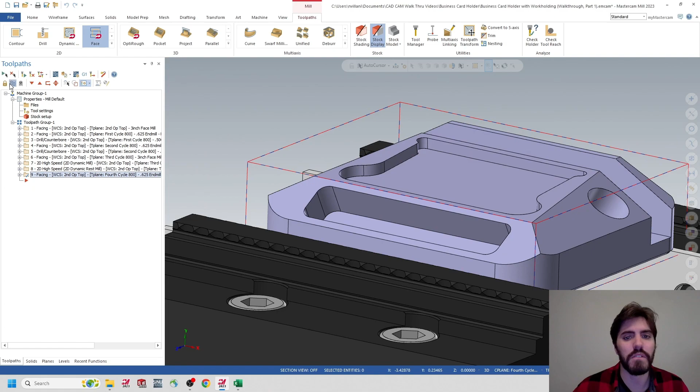And we can also see what the updated time is with those 2 new toolpaths. Okay, so I'm going to go ahead and play this. Our feed time now is sitting around 3 minutes and 12 seconds. I think that's pretty good. Okay, and then we're going to get to right around here, and I'm going to slow it down.

So right now it's just doing that finishing of those corners, and I'm going to pause this really quick, slow it down, and I'm just going to move my slider right around there and see what this looks like when we start to get some of these passes. Okay, so it looked like... I'll actually rewind it, and I'll just go to here, and I'll slow it down, and I'll play that out. Okay, so I'm just going to let it run its course.

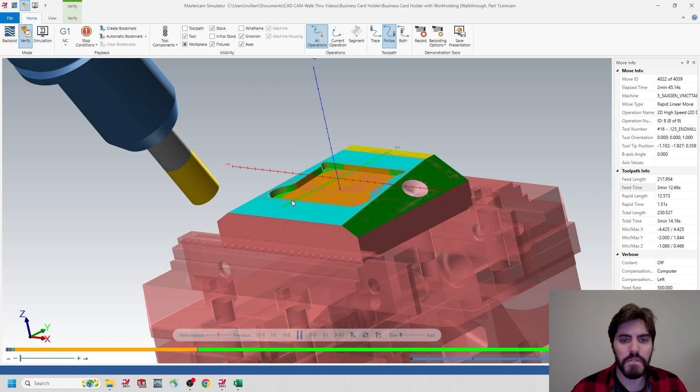So the first 2 passes look like they're not really cutting anything because we already removed that with that blue face or that 3rd cycle 800. So I could probably come in there and step out, and I know that my depth of cut was 0.15625. So I could take that value, and I can come here into parameters, and go to depth cuts, or sorry, linking parameters, and this value 0.5, I can actually say 0.5 minus 0.15625, and that's going to give me that value. So I took out one pass.

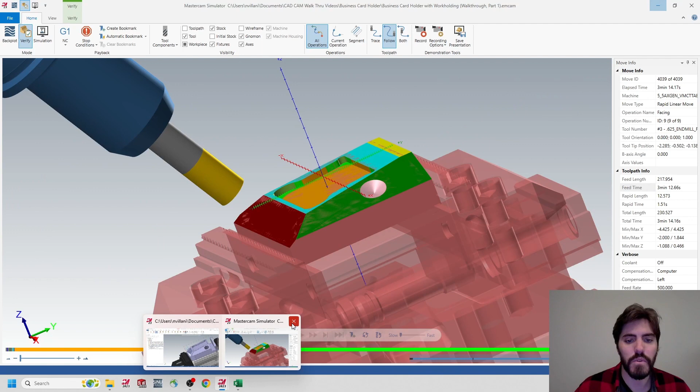So I'm going to see what that looks like now, and you can see that that blue toolpath disappeared. So let's go ahead and see what that verify looks like again. I'm going to close out of that. Oops, I'll have to grab all my toolpaths once again and verify. And once again, I'll just take this play bar, and I'll just kind of zoom up into this edge here, and then I'll see what this looks like.

So now that first pass should not be cutting air, it should actually cut into the part. So looks like it's facing off a little bit. I might even want to go down a little bit more. So I could take off another 156 and see what that looks like. So I'll come in here, I'll just do this once again, minus 0.15625, and I've got a value of like 187 above as well. Okay, and we'll just do this one last time and see what it looks like and leave it there.

Okay, so it's just finishing up this corner, and now we should see a much more appropriate cut across that face. I think that's a little bit better, especially given the size of this tool. So again, we can kind of optimize our toolpaths and make it a little bit better. And we'll talk more about that in another video, but just some quick optimization that we can see there.

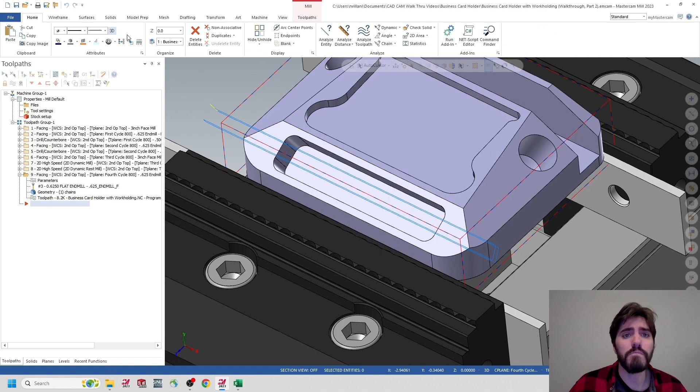All right, so we're going to have to do another pocket here, which is going to be the additional detail on that fourth cycle 800. And I think we're going to approach this in the same way that we did with this third cycle 800 and use the dynamic mill. So really quickly, again, good habit, we're just going to investigate what these corner radii are to determine what tool we're going to use. So if we go over here to home, we can click on Analyze Entity. I can click on this corner, and I see that there's a value there of 135.

So that opens up a little bit more options for us to use, and I'm going to actually utilize the 250 or the 1/4 inch end mill because that has a corner radius of 125, which is smaller, and it should allow us to swing here in these corners. And I'm just going to go ahead and hop over here to the toolpath tab. I'm going to grab the dynamic mill. And again, there's no details or islands that I really have to watch out for. It's just a simple pocket. So I can get the automatic region once again.

I can grab that face, hit the green check mark, and then I just have to have stay inside. So again, automatic regions, that face, stay inside, and then we should be able to hit the green check mark. So now I'm going to hop over here to the tools, and I'm going to choose the 1/4 inch end mill. So I'll get that 1/4 inch end mill right there.

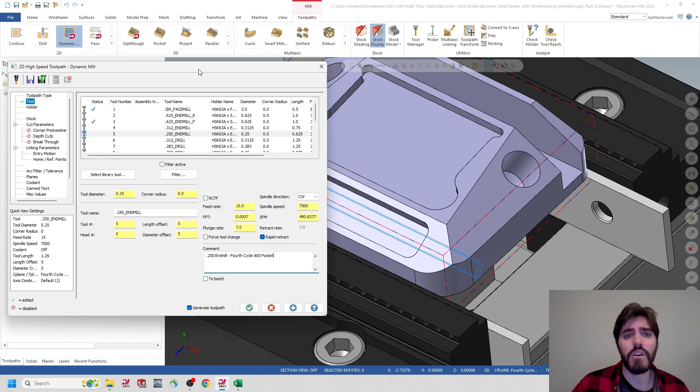And I'm going to type in a note here of 0.25 end mill, and then I'm going to put a note here, fourth cycle 800, and I'm going to put pocket there. We don't really have to do a cleanup pass like we were doing before with a roughing and a finishing. If we wanted to, I could come in and maybe use a little bit bigger of a tool, but I think my only advantage here would maybe be to use the 312 end mill and pretty much clean up to near finish and then just take one skin cut here on the 250 end mill. And we might talk about that with the optimization video. However, with this one, I'm just going to use one tool here.

And I'll go over here to stock, and this is still picking up the settings from the last detail. So the last time that we used the dynamic mill, you just want to make sure that we turn this off because we really aren't pulling any other operations into consideration here. So make sure that stock is turned off. Cut parameters, we're going to leave 0 on the wall, 0 on the floor.

And then we'll come down here to linking parameters. And again, like what we did with this other pocket, we really don't have to consider all this other material up here. So I'm just going to click top of stock, and I'm going to grab one of these corners. So it should be 0. And then depth, absolute. I can always check it, but since I already grabbed that face, it's registering as that negative 0.375. Entry motion, depending on if the toolpath is generated or not, we might have to come back in here and adjust this helix, especially since it's a little bit tighter of a slot. So I'll just see what happens here, and I might come back and update that to 0.065, depending.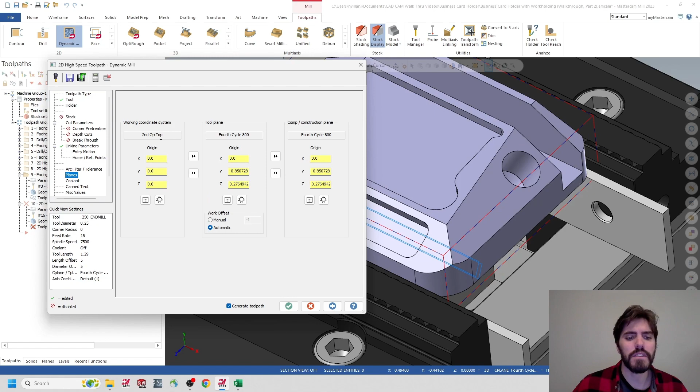And then we'll come here to planes. We see second op top, fourth and fourth. That's all good, and I'll hit the green check mark. So I'm seeing that value there. One thing I did forget to update here is the depth of cuts. I think that's just way too deep for that tool that we're using, especially for hogging out all that material. So really quickly, just come back here into parameters, and then we'll just do depth of cuts, turn that on, and change it from 0.0625 to

0.125, and I can always check that here inside of my tool library. I have the 250 end mill here, and I can see that I have a 250 or a 125 depth pass there. So I'll just update that to 125, and it's probably going to generate 3 levels there for me. And again, I can kind of see how long that toolpath is going to run. I think it's probably going to take a little bit more time than you would think, just because we're getting at this whole detail here and we can't really utilize that big tool like we could here. We're kind of limited in what we can use.

So I'm going to go ahead and check that here in the verify. And that one detail there is running us about 8 minutes. And I could obviously try to change it out a little bit, but I'm going to save that for the optimized video, and I'm just going to leave that one alone. I'm just going to say, yeah, that 8 minutes is fine as is. And I'll go ahead and move on to some of these other details.

And I think one thing that we have to consider as we're swiveling these planes is maybe trying to optimize what details we're doing. And I was doing it here in the background. Maybe you noticed it or not, but I basically was here at the part. I rotated it here, and then I did that face, and then I went into that fourth cycle 800, which we're at now. So if I wanted to, I think the next logical location that we would mill is just returning back to the square second op top and then getting this slot here instead of having to rotate back to the front side and then getting this detail and engraving it.

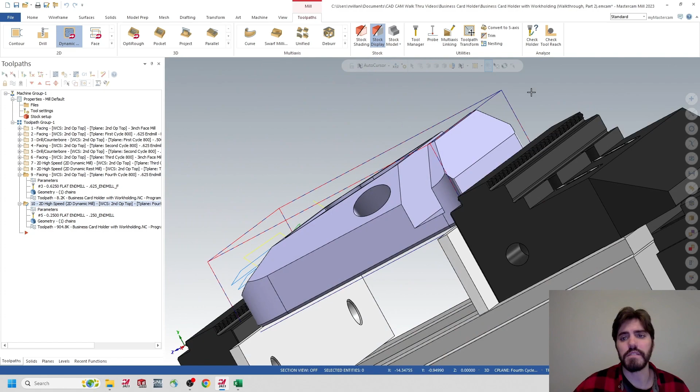I think I would rather go ahead and cut that face there. So let's go ahead and minimize these, and we'll just change our levels, and we'll grab this wall here. So let's go ahead to levels. Oh, sorry, go to planes, and we'll just change our C and T plane back to the second op top. And then at that second op top, I'm at that square level now, and I can grab this slot detail.

So we'll go into toolpaths, and this should be pretty easy. We could probably utilize the dynamic mill once again. If I want to go to dynamic and then automatic regions, again, I can just grab this face there and then hit the green check mark. And then I can just choose to stay inside. And I'll go ahead and hit the green check mark. And we'll go to tools.

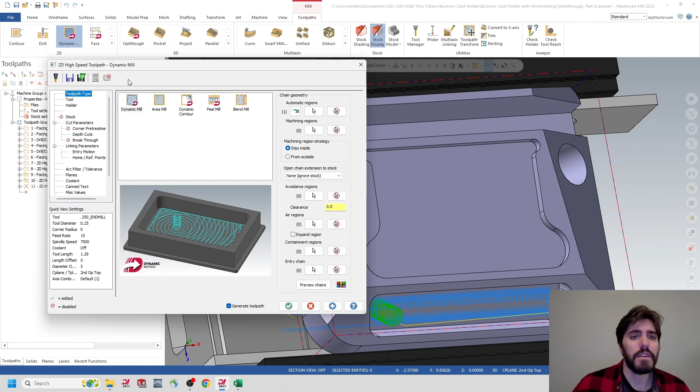This is a little bit wider. If I wanted to, I could kind of measure this out, but I know that value is about 0.406, so I can use the 0.312 end mill here. And I'll just title this 0.312. And I'll actually end up doing this in one operation as well.

I could, and I'll save that for the optimized video, but I'll probably do like a roughing operation, and I'll do like a final skin pass here to kind of clean up the edge. I'll probably do that in both these details, but for what we're doing in this first video, just trying to get our toolpath established and trying to gauge what our total runtime is, let's just do this in one pass here. So I'll do 0.312 end mill, and then we'll title this just card slot.

Okay, and then we'll make sure that the stock is turned off. Cut parameters, stock to leave on walls, we can leave that 0 on 0, and then we'll go down here to depth cuts. We might have to adjust this a little bit, especially for running it, but I'm going to look here at the 0.312 end mill, and it's saying I should be able to go down to about 0.156 per pass. So I'm going to change this and update this to 0.15625,

and I'm going to come here to linking parameters, and it's saying top of stock. It's still registering that top mesh there, so I'm going to update that. Top stock, we really only got to worry about that detail right there. Depth, it is recognizing it as that bottom floor, but I can always double check it. It's still getting that negative 0.75. Entry motion, this really isn't going to come into play. I think the dynamic mill should recognize it and adjust it as it needs. And then we'll go ahead and do planes, second op top, all that's good. And then we'll hit the green check mark.

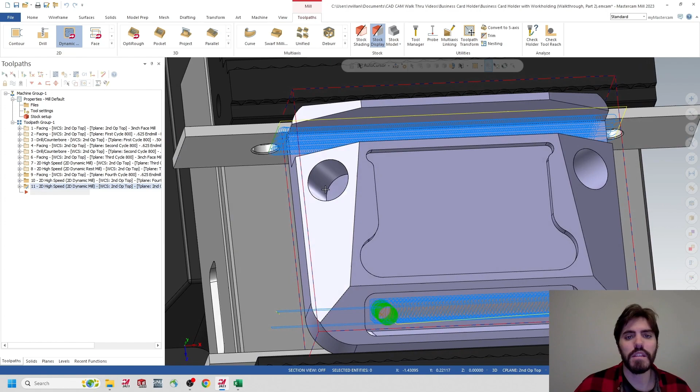And it did recognize that there wasn't any geometry there in the walls, so I didn't have to actually adjust anything. And it's just going to break through that wall on its own, which I think is pretty smart and powerful technology here in that dynamic mill. And that's why I chose to use that with this specific operation. So I'm going to see what this looks like in Verify. And I'm going to go ahead and select my entire toolpath group 1 so that there's a check mark next to each one of these folders, and then I'll click on Verify.

Again, I mentioned this at the beginning of the video, but our feed time is a little high, but it should be around that 26, 27 minute mark. And there are some obvious culprits like those dynamic mills that we just did. We did spend some time, and I'm going to let this play out here, talking about this detail with this pocket where it was going to be about 16 minutes. However, I think this is just too big of a culprit to ignore, and that's why I went ahead and did a roughing operation, and then I did a finishing cleanup pass with that 1/8 inch end mill.

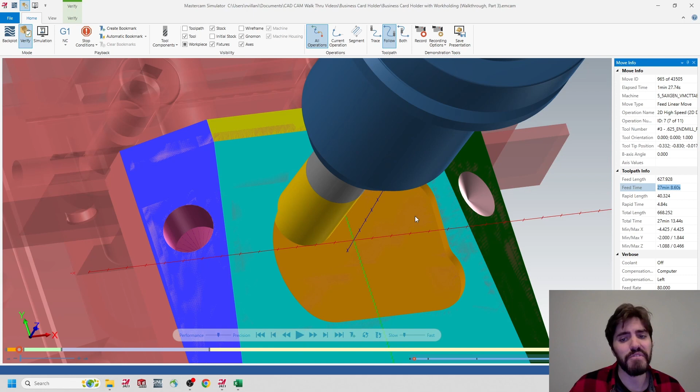And you can imagine if there was like 16 extra minutes in this file here, we'd be easily up there in that 40-minute mark. This 27-minute mark is a little high, but 40, that just wouldn't cut it. So there's opportunity to go ahead and try to optimize some of these toolpaths. And again, I'll let this play out a little bit.

And I'll talk about the dynamic mills that we just did. So this detail here is going to be the exact same approach as this detail here, but what it's doing, and it might be easier to see against these two colors here, but it's essentially taking the end mill and it's kissing the material, and then it's coming back, letting the chip escape, and it's really taking out a lot of that heat that is generated by just plunging and cutting across.

So in some instances, I think dynamic mill is just way too smart for its own good, which is good for us because I don't have to try to manually put these cuts in. So it's going to take a little bit to cut through this detail, but it's really extending the life of the tool and going to give us a better surface finish. But again, there are some opportunities for us to try to take advantage of improving these toolpaths.

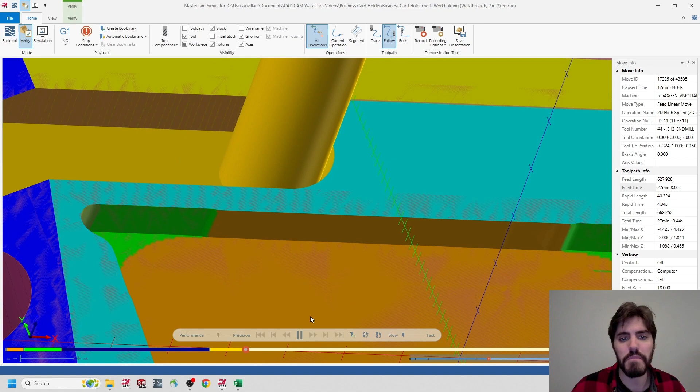I'm going to pause that and come back up here. And you'll be able to maybe see this a little bit better against these two colors. But again, slow this down. And what it's doing is it's kissing the material, coming back, letting the chip escape, and then kissing the material, coming back, and letting the chip escape. So again, very advanced and smart toolpath that the dynamic mill is generating for us.

However, it does take a little bit of time to cut each one of these details. So I'll just have to, again, come back in and optimize that a little bit more. So I'm going to fast forward that, let it all play out. And there's going to be one last detail for us to consider, and that's going to be this face here, which is going to be where the nameplate is going to be placed.

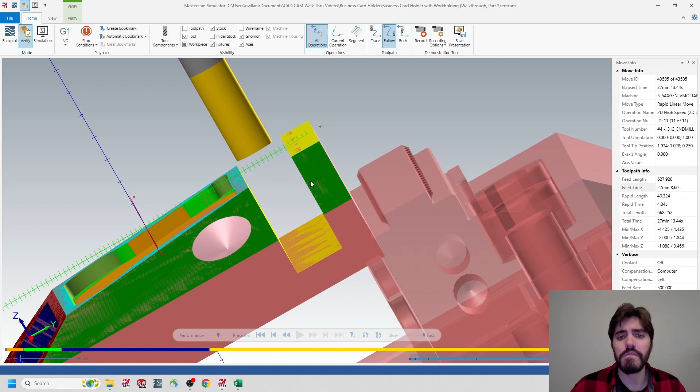So there's two ways that you can approach this, and it's more or less how your part is going to machine. So in one argument, you could say that instead of cutting this detail before that detail, I would maybe reverse them, where I would cut this face so that this is solid and I get the rigidity out of the part. Or if I'm trying to optimize the swivels, I might cut this face first. You might get some vibration if this is cut away, since this is now considered a thin wall. But you'll probably have to machine it and just see how things go.

So in the optimization video, I'll probably reverse these around a little bit. But for right now, I'm just going to let that sit, and then I'm going to come in and do that last face there. So I'm going to X out of verify, and then we'll go ahead and do this last face. So we'll jump over here to the planes, and we'll go ahead and activate the 5th cycle 800, which is going to be our last cycle here. And it's rotated like this.

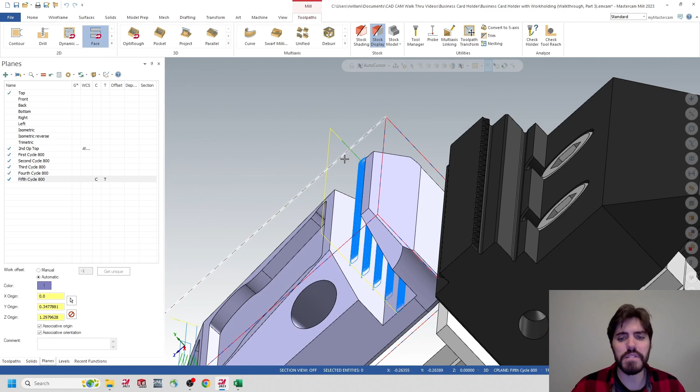Again, I would probably do this as a swarf where I'm cutting with the side of the tool, but I would have to reverse this cycle 800 and then put a wireframe line and make a contour pass. However, I want to utilize the same plane here so we don't have to create multiple planes to mill out the logo here, or the name that's going to go on the front side. So I'm just trying to keep it simple on this one. When we do get to that optimized video, I'll probably utilize that.

So let's go over here to toolpaths, and then we'll just do another face mill. So if you go to the toolpaths tab, click on the 2D gallery, we'll get the face mill, and just make sure that if you have text here, don't grab the whole face, because then it would try to isolate the text and face mill those out. However, if I just go ahead and click on my loop, we'll make sure that my arrow's going this way, hit the green check mark, tool, go ahead and use that 5/8 end mill once again, so 0.625 end mill, and then we'll give a note here for the 5th cycle 800, and we'll put face afterwards.

And then we'll go ahead and grab our cut parameters. Probably won't be able to take advantage of the one pass just because of how thick this area is, so I'm going to utilize the zigzag. If we have any errors where it's either getting too close to the vise, or maybe the toolpath isn't generating, we might have to come back in here and change some of our step overs. But for now, I'm just going to leave that as is. Depth cuts, it's still remembering the last face mill I did, which was the 4th cycle 800, and it's still that max rough step of 0.15625.

Linking parameters, maybe I can change this top of stock, see where it's coming from, but I'll click on that top of stock and just double check and just grab that quarter. So yeah, that did update. So it's probably going to make 2 passes here for me.

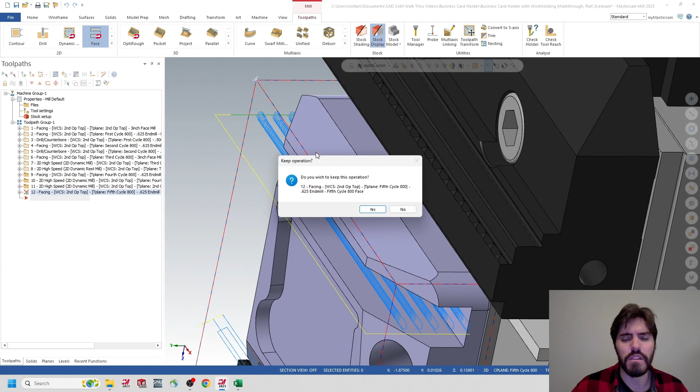So I'm going to keep the operation. I'm going to go ahead and come back in here. And I'm going to just double check, make sure that my arrows are going the right way. My roughing angle, let's go ahead and change that to 90, see what happens. So it's coming back and forth that way. So that's not what we want to do. So I'll make sure that that is back to 0.

Let's change some of these values here. Let's go across overlap. Maybe I'll make that 15%. My next area would maybe change this detail or change that detail and see what happens here. Okay, so just making it a little bit bigger let us get that toolpath in there. It's just widening the across overlap.

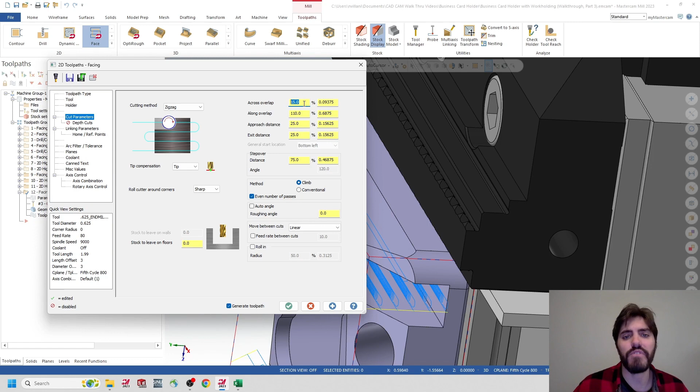So I just made a change here in the across overlap from 10, which is what it was defaulting to, to 15%. And it seemed to apply that toolpath for me. So sometimes you're doing the right thing, and you just have to change some of those parameters based on the area that you're cutting or the tool that you're using.

So let's go ahead and see what this all looks like. This, again, I think it's going to be a little up close and personal with the vise, and that's why I would try to utilize the side of the tool rather than the face of the tool. However, I'm going to verify that and see what it looks like. So verify. I'm going to probably pause here and then go to the end so I don't have to watch all this play. And I'll just take my play button here and just drag it all the way down.

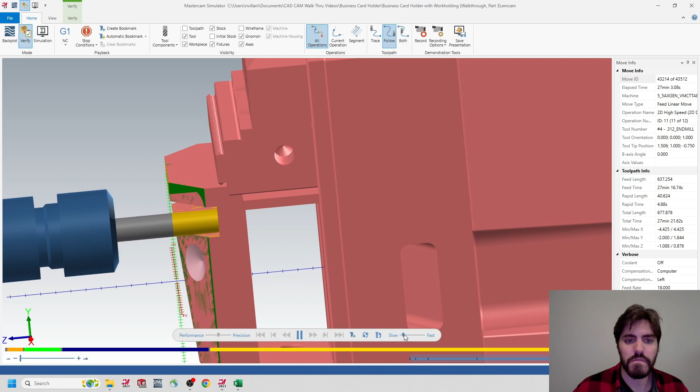And then I'm going to make this not as transparent with my workpiece, kind of see it solid there. And then I'm going to go ahead and play out the rest of this and then turn it down in terms of speed. Okay, so it's making its last cut across. And then when it finally gets here, I'll back that. So I'll hit B, kind of place that back.

And again, you can see how close this would be if I go to the right plane. It's not terrible, but it's just a little bit too close for comfort in my opinion. And I would try to get a little bit more space out of that. So I think that face mill is pretty good. It's not like it would crash or anything, but you might scare the operator if you give him that program. So that said, I think we did a pretty good job with this.

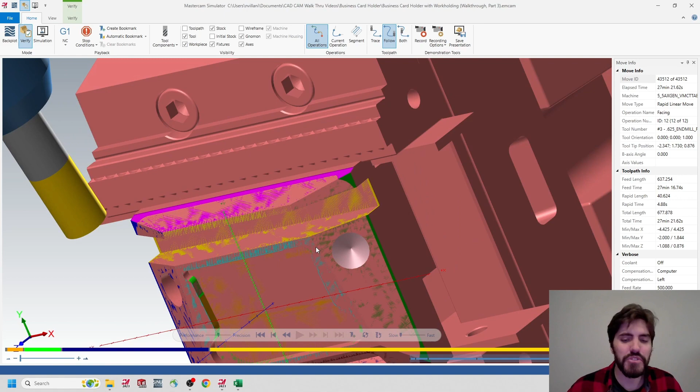We can maybe look in another video at the text here, but that should be pretty self-explanatory. We just got to set up some new wireframes or pull from the SOLIDWORKS configuration and whatever name or branding that we want to put on. So as far as talking about the toolpaths and maybe optimizing, we'll do another video, but if we just wanted to get the first sample out, this is a pretty good program. I feel pretty good about it.